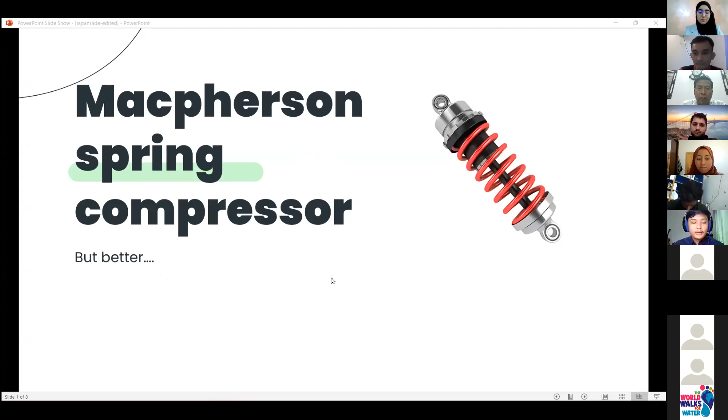This is the old tool that we will be using in the workshop here in Malaysia. We use this tool to compress the spring from the Macpherson strut.

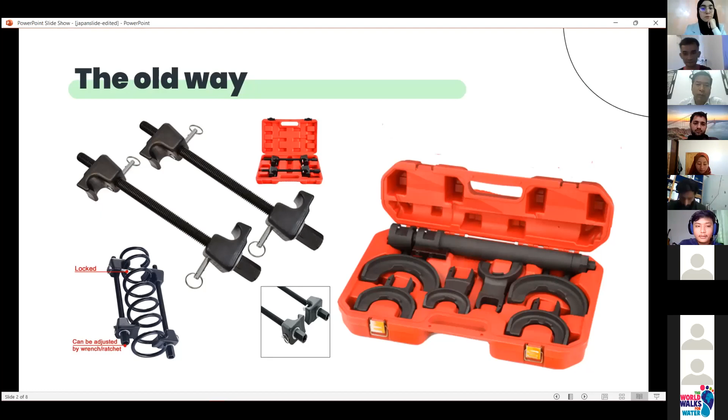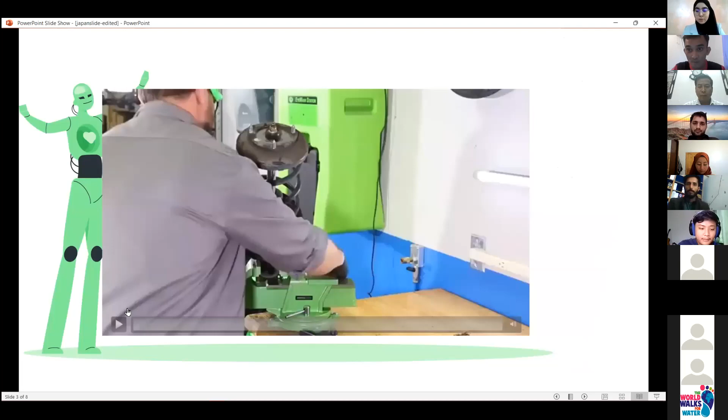This is a simple video to show you how exactly we use the tool to compress the spring and remove it from the Macpherson strut. Make sure the spring doesn't slip. Lubricate the threads on the center screw to help prevent deterioration.

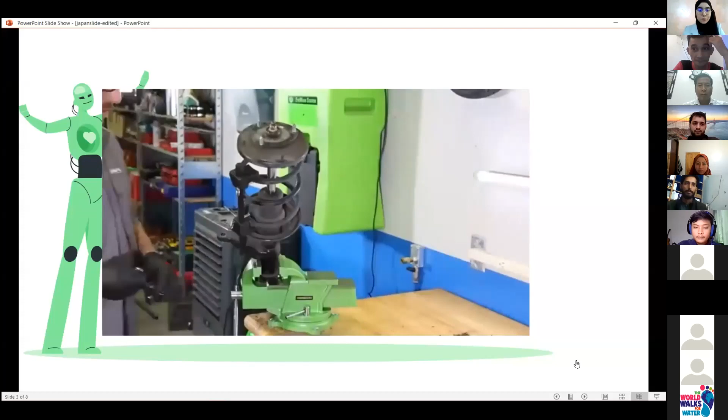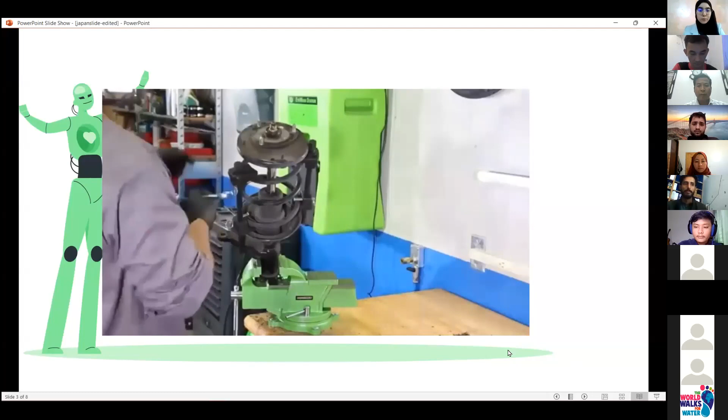Attach the OEM tool's strut spring compressor to the coils by positioning the clamps on opposite sides of the spring. This will prevent bulging of the spring as the coils are compressed. Make sure the safety pins are securely in place on the coils so the clamps will not come loose and slip off of the spring.

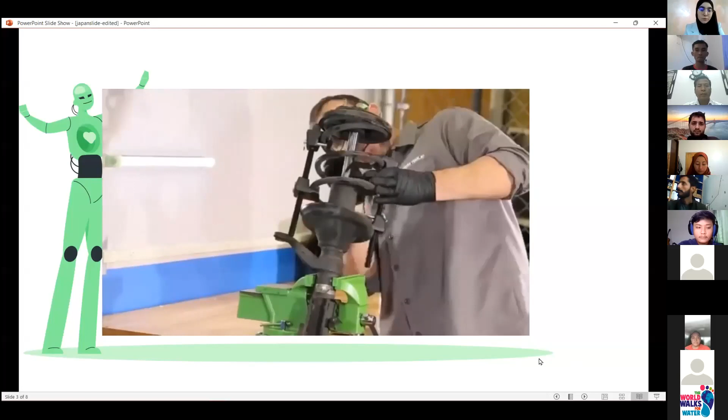Tighten the clamps using a wrench. Alternate between the clamps as you tighten them, and tighten them evenly so the spring remains balanced as you compress the coils. Clamp down on the spring until it's free from the spring saddle.

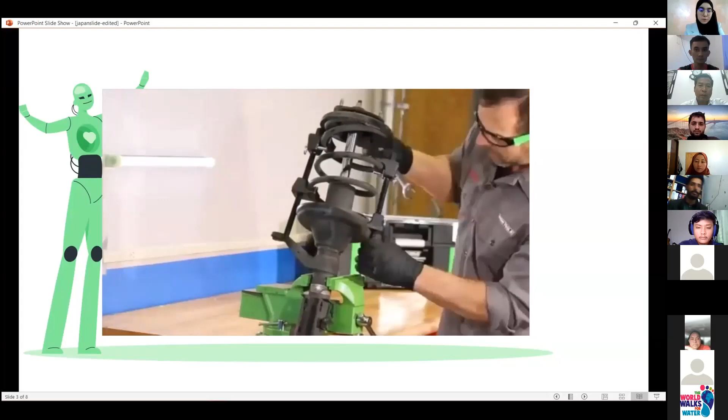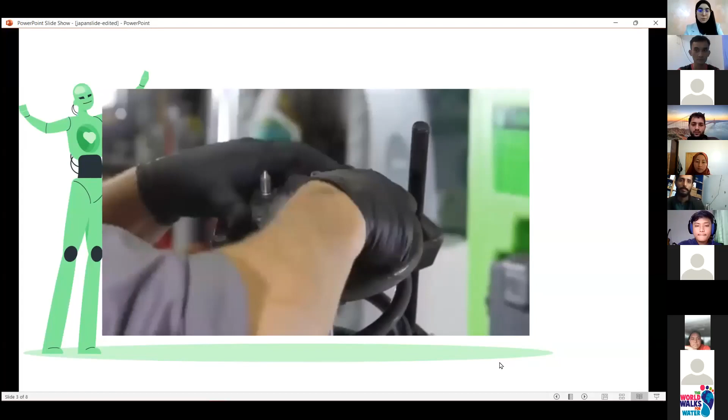But don't overcompress the spring. The coils should never touch. You'll know it's done when the spring saddle is free. With the spring compressed securely, take off the top bearing plate and safely remove the spring. You'll need to hold the shaft securely as you loosen the nut with a wrench. Carefully lift the spring off of the strut tower and set it aside.

As you can see, this is the old way to remove the spring from the Macpherson strut. The problem with this is, if dropped, the coils on the spring could pop loose and cause serious injury, which means this old way is a very dangerous way to remove the spring.

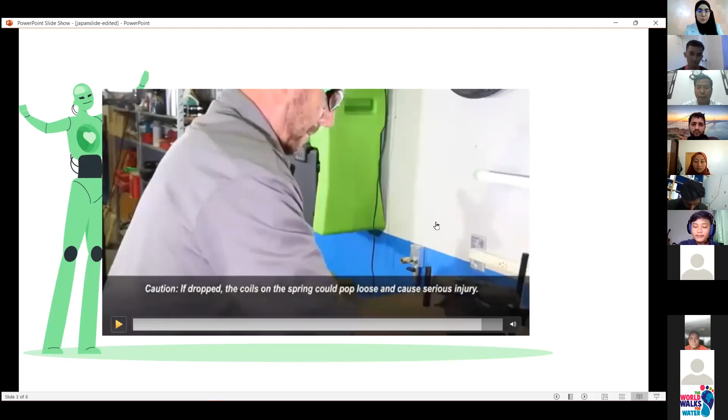The disadvantage of the old tool is that it is a higher risk tool, which can cause the spring to slip and cause injury. I've seen people do it myself, and when the spring pops, it causes really serious injury to them.

The second disadvantage is that this method of removing the spring is very tiring, requiring high energy usage because it involves using the tool to compress the hard spring by hand. The third disadvantage is that it's a very time-consuming method, requiring around 20 minutes just to detach the spring from the strut.

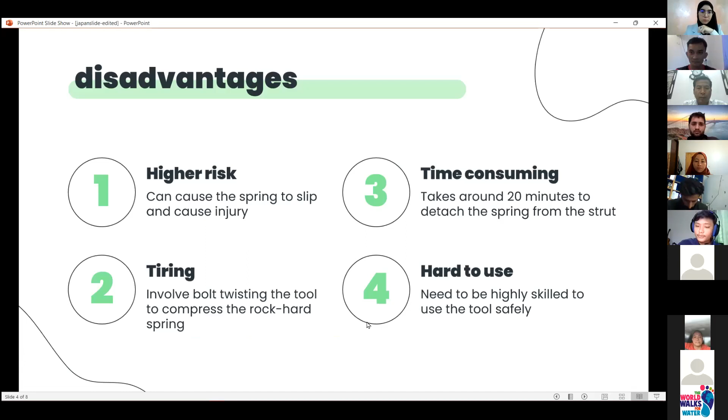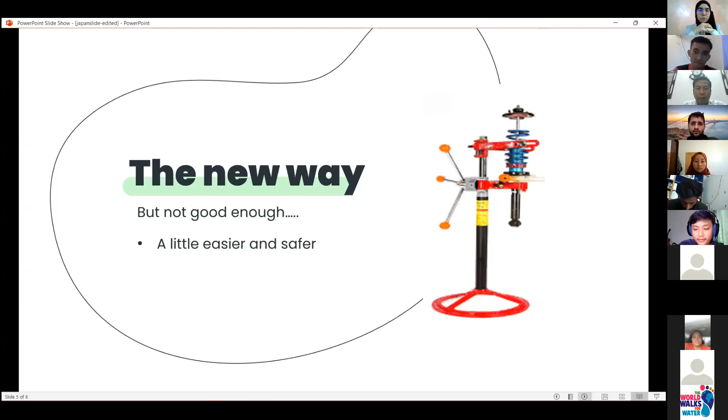The fourth disadvantage is that it's really hard to use - you have to be highly skilled to use the tool safely. There's a new way in the market right now, this machinery here, which is a little easier and safer, but still not good enough - there's more room for improvement.

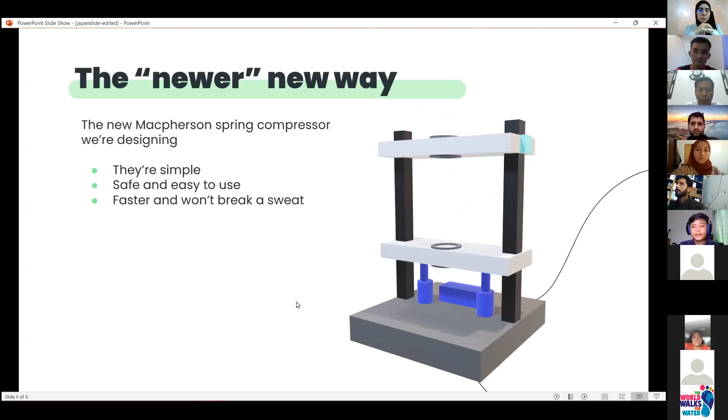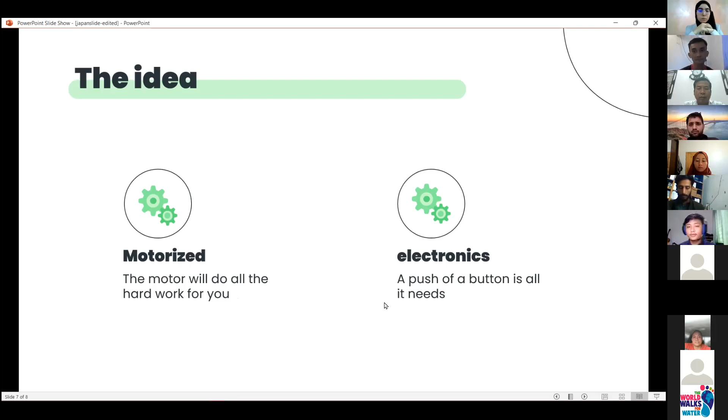So this is our project prototype, the new Macpherson spring compressor we're designing. It is simple, safe, easy to use, and takes a lot less time to complete the task. The idea is to use motorized machinery so you don't have to do the compressing by hand, and we'll enable electronics so that with just a push of a button, you can compress and decompress the spring.

The advantages of my project are that it's easier to use - you just place the spring, lock it, and push the button, and it will do the compressing for you. It will be faster since it uses machine power instead of human energy. It will also be safer, as the spring will not pop loose, and you can keep your distance while doing the task.

So that's it from my slide. Thank you for your attention, and I'm ready to answer your questions.